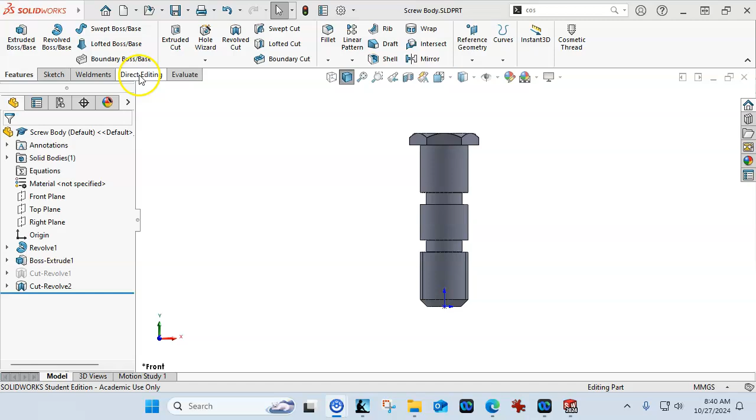Okay, so the assembly for P6-11 is not going to be real in-depth. We'll just bring up our assembly. It should jump right into the insert component. No, guess I still have that turned off. So let's go insert component.

We'll browse, I'll bring in the threaded body, and we'll just let it go that way. And then we can insert components again, bring in the screw, line those up. Oh, and my first indication, oh, it fixed both of those. So, not, I guess I just clicked the check box automatically.

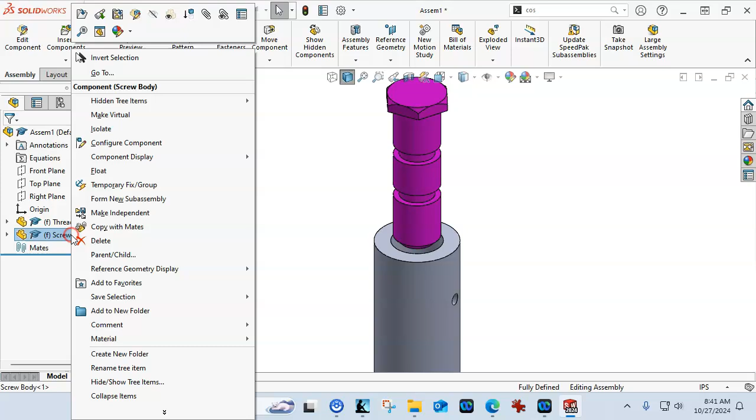But if you do get one fixed, just right click and float it. And then notice that, well, let's see what we need here. We have the 709, so we're in inches.

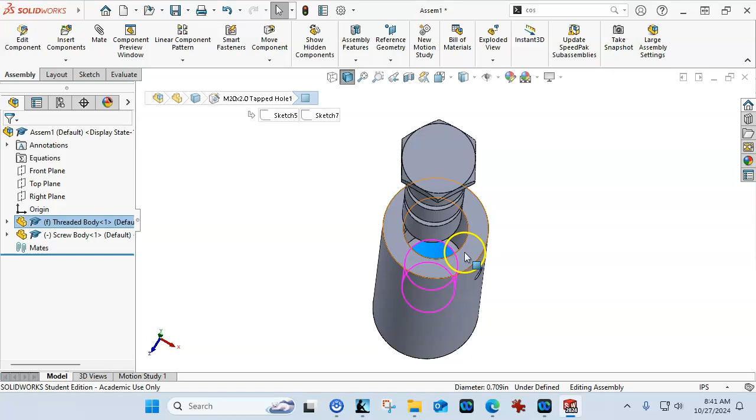Okay, that makes sense, that's the 18 millimeter. What I was going to say is I thought that the 22 millimeters, but for relief, yeah, that should be okay. All right, so we're going to make those concentric. If not, if this was the wrong size, I'd go back and check the minor diameter.

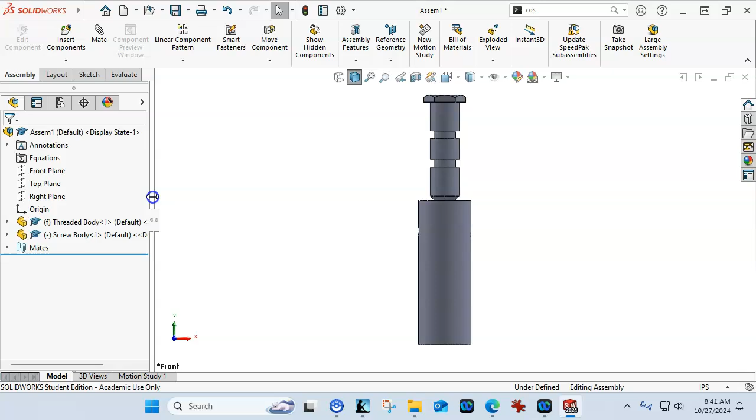All right, so let's go to looking at this with one of these guys. That was the hide, we want to go to the next one. And the body, we will put in hidden lines visible. So as that makes the intersection, we kind of see what's going on with the geometry.

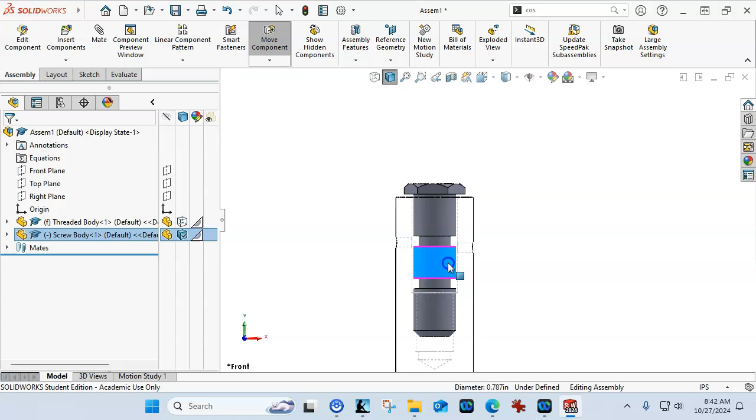So we're not going quite to the bottom, which is good because if we do tap this, and tapping is going to be sort of what material. I mean, I didn't see anything called out, but I've been doing a lot of 304 and 316 stainless lately. This is aluminum, I'm a lot less concerned about it, but...

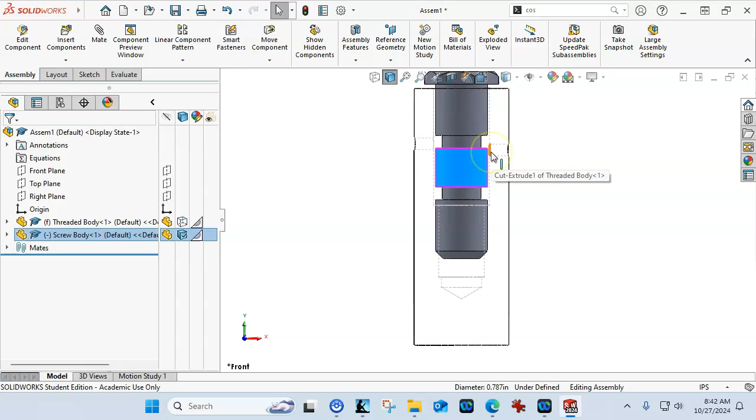...otherwise the geometry becomes a little bit of a challenge. Oh, and this one I put the same size. So we need to make an adjustment to the second.

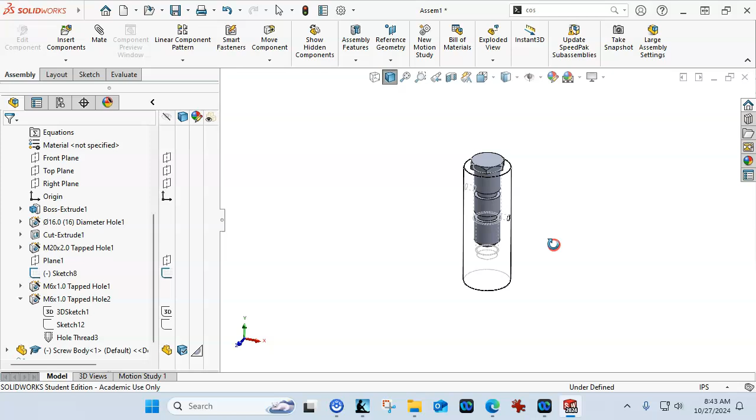So those look lined up. Again, the M6 going into a 5 millimeter thread, we're going to see some interference. So maybe we make those, they called them an M6 by 1.0. That still seems like it's going to be a little deep, but let's go into the toolbox.

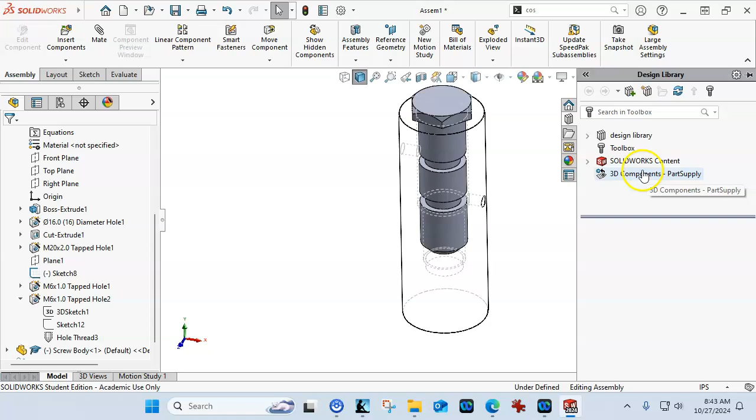So we're jumping into the library, and in the design library, we can go toolbox, tell it to add in now. We're looking for ANSI metric, bolts and screws, and we would like a hex head. Doesn't call out specifically, so probably not the heavy. We need something that will be small enough.

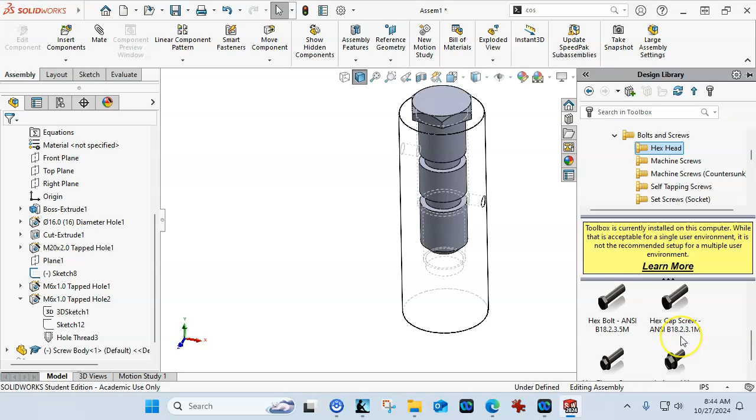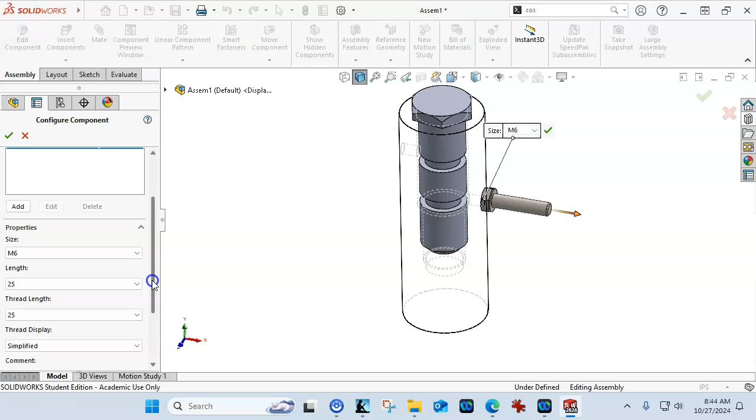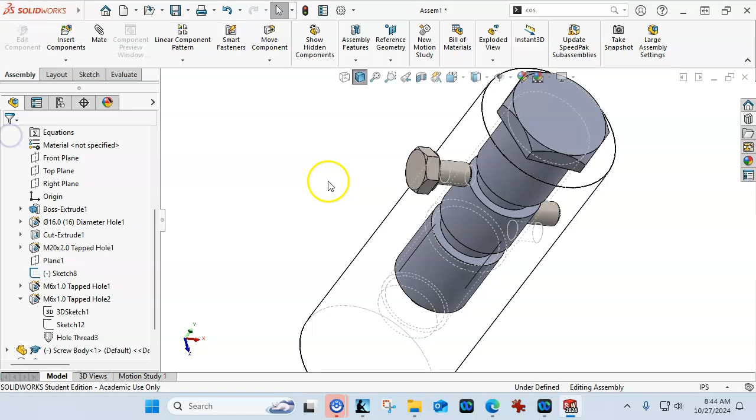All right, so this didn't jump to my geometry, like that one did, so I didn't get it lined up. But if I can, I'm going to look for the stack of marshmallows, or the concentricity, and let it do its automatic relation. All right, so that is the interface.

If we wanted that to go into the geometry, the M6 screw would be enough smaller that I wouldn't really have any issue with it going in and contacting. Maybe there's an O-ring in there, and if we were to do an O-ring and a seal, maybe that comes in and just pushes on the O-ring and provides some resistance. All right, so there's some different mechanical options there.

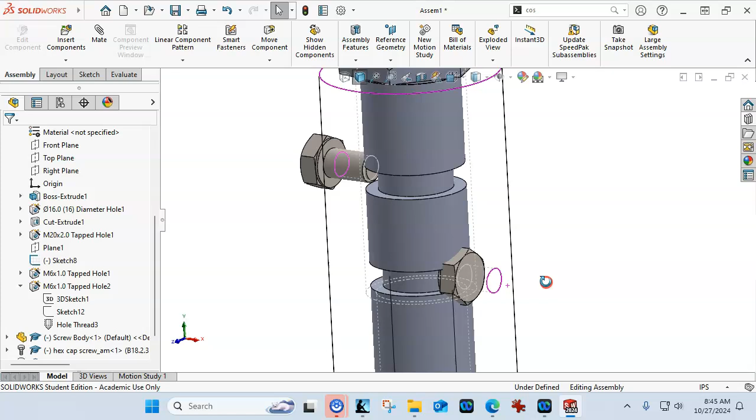Let's go ahead and select Control Select. We're going to go concentric, and I'm going to flip the mate alignment, and then we need to get that out of there. All right, and then for setting this, I could go tangent, because really that's going to be where, very closely, it's going to contact.

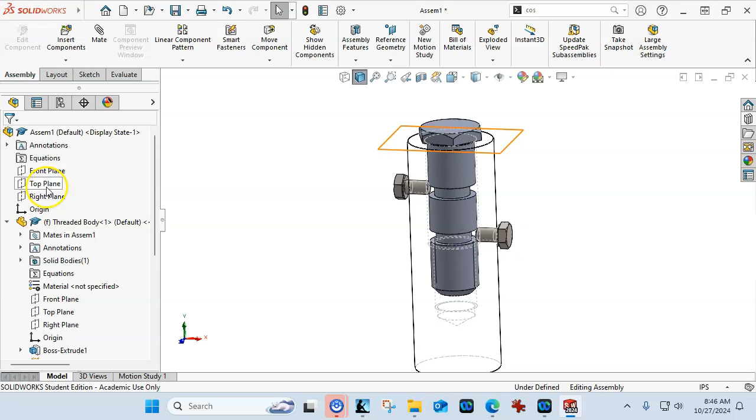So through the wireframe, I can pick those, and we go to those faces, and I can say, okay, put that at tangent. And the other option then would be, I'm pretty close there. This isn't super critical as to our geometry, so having something easy to pick.

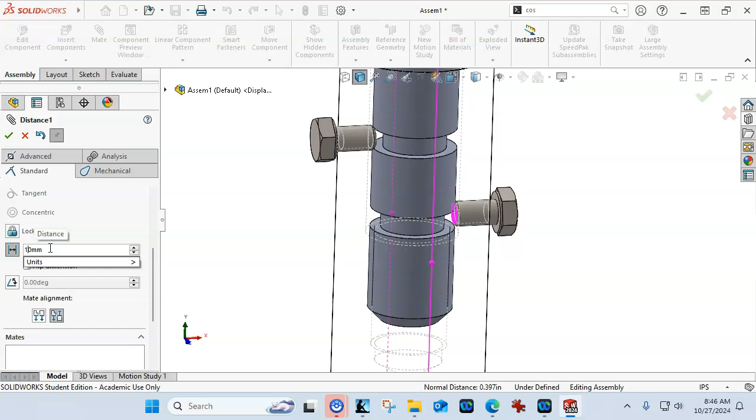But if we wanted to go with that 20 millimeter, then let's see, my mates did not show up, so we'll go distance. And we had 10 millimeters. Oh, that was 22 millimeters, so 11.

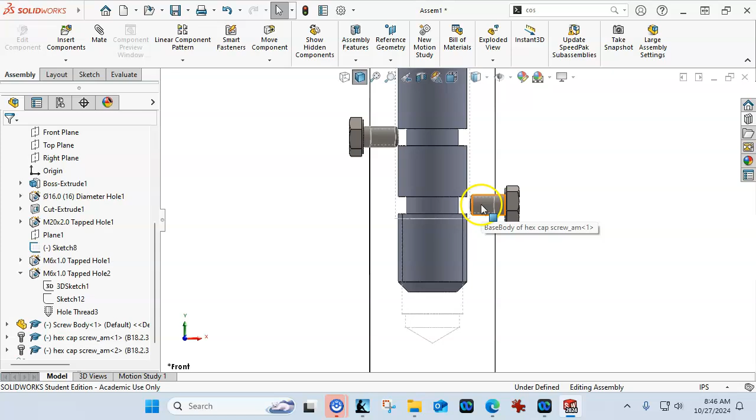Okay, so that puts us to the outside. So if we did want to control the outside, just guessing, not knowing what this really does, we're kind of stuck with maybe this is a mount, maybe this is a port. There's a couple of different ways to approach it.

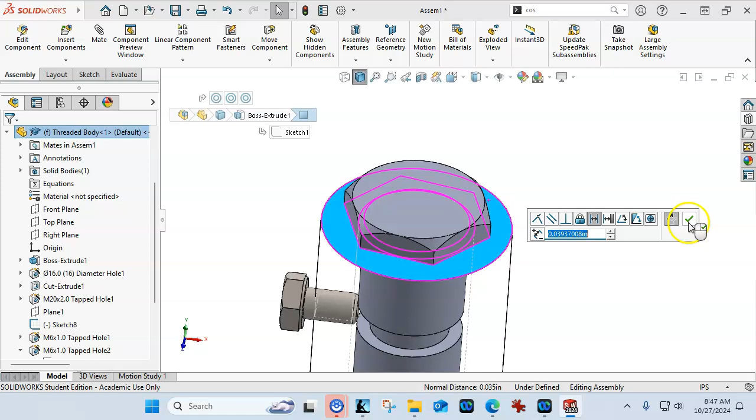All right, so looking at the face, let's move those over, and I want to go with the distance again. Let's go 1 millimeter, and we'll go ahead and accept. All right, so that puts it pretty close. Everything looks centered. It gives us our chance to make some decisions.

All right, so for the view, let's go ahead and put that one back into default. And we'll make sure to save this as the... I don't think it gave us just an exploded assembly. So I'm gonna make this into a valve of some kind.

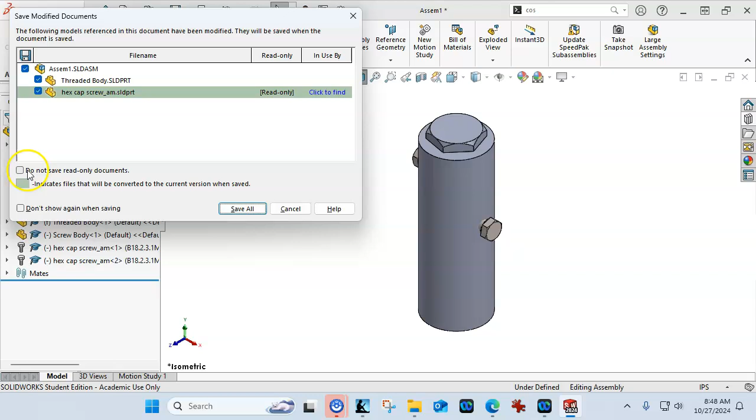So let's do this. Oh, and no, we do not need to save the hex, so we can either uncheck that or do not save, so it takes it out of the list. And whatever you want to call this, we'll name it as the valve. While we're here, we'll go straight into the exploded view.

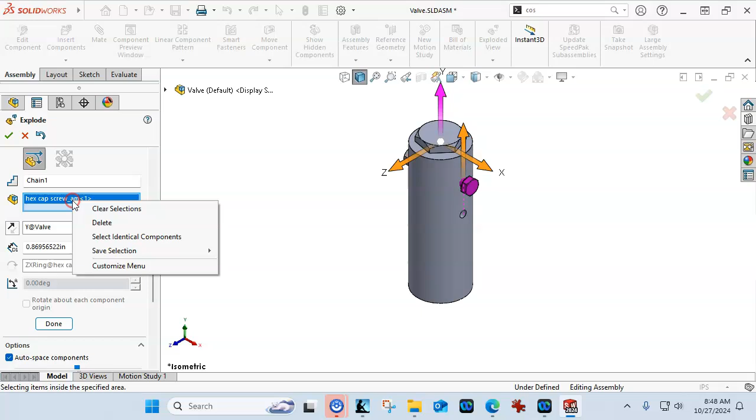We're not worried about the auto spacing because it's pretty much just going to be these items. So 3 inches should be enough, and then done. Oh, I guess I added that one to the group. No. Oh, got them both. All right, well, let's try that again.

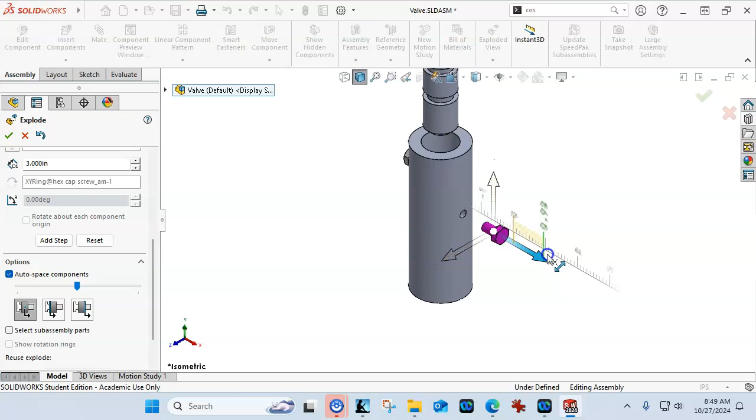All right, make sure that... all right, got to make sure in the list that I didn't already. All right, so there is only the one. And done. Then we pick the next one and we drag it out a little ways and we see what we got. 1 inch would be fine. And done.

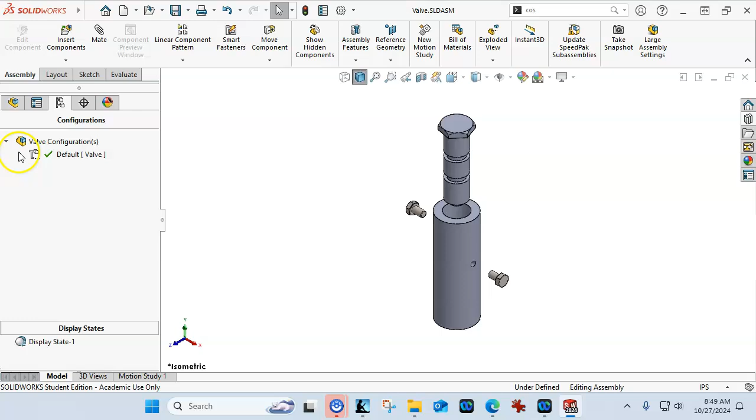And then the last one. And done. All right, so that gives us our shape. Okay, so then I'll go ahead and illustrate the assembly cut, and I'm going to use this in the drawing as a cutaway view of the face, of the intersection. So if I go back to the exploded view, collapse it, and then let's go back to the design tree, and I'll just open up a sketch on the bottom.

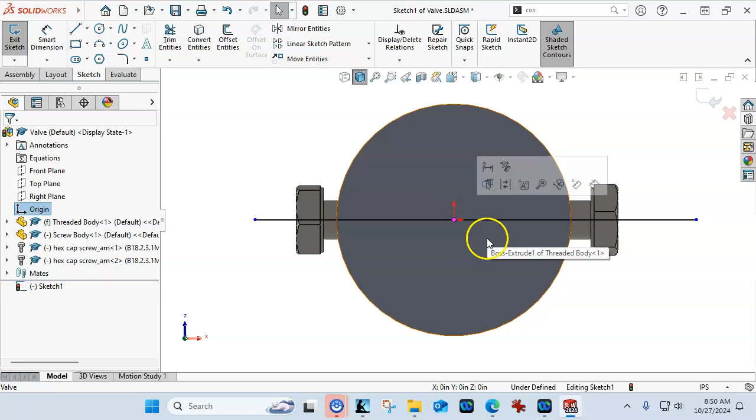And we're going to draw—I don't know if it needs to be infinite length, but we'll make it long enough that if we needed it to cut through everything, it would. And we'll set that as the midpoint. And our length, we can go like 3 inches. It's not that it matters.

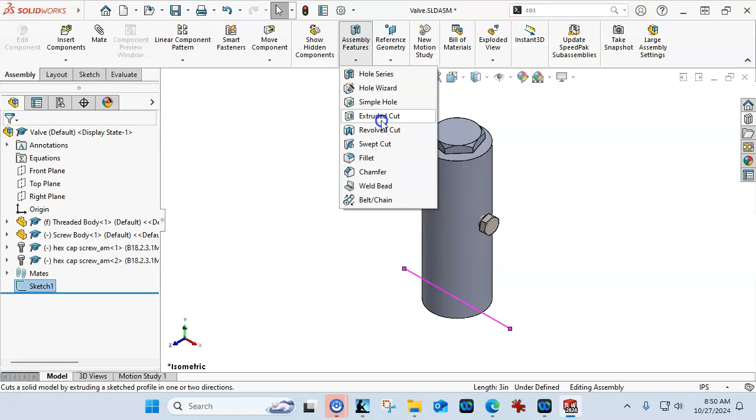All right, so back into the isometric, selecting that sketch, we have assembly features, and I want to do an extruded cut, but I only want to cut the threaded body. So selected components, and we're going to turn off the auto select so that it gives us the geometry that we want, and then we're going to go through all. So the first arrow goes this way, and the arrow that does the flip side to cut does that one.

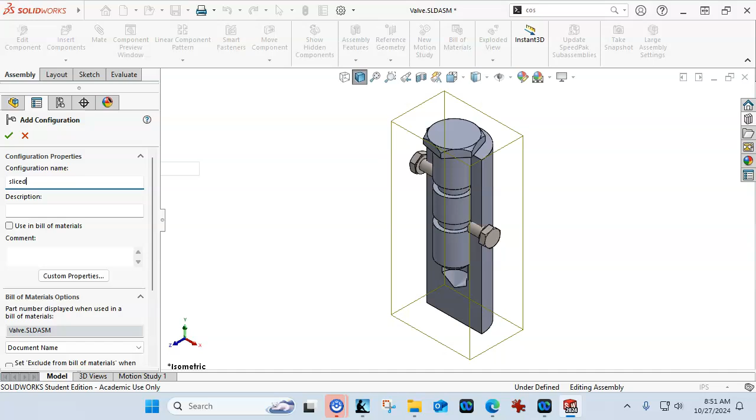All right, so having done that, I did not set this up for a configuration, so the best way to manage this is to add a configuration, and the configuration name is—we'll just call it sliced. And what I want to do is, we're double checking, we're in the default, we need to suppress. So depends on which way you want to work with that, but that gets us the geometry.

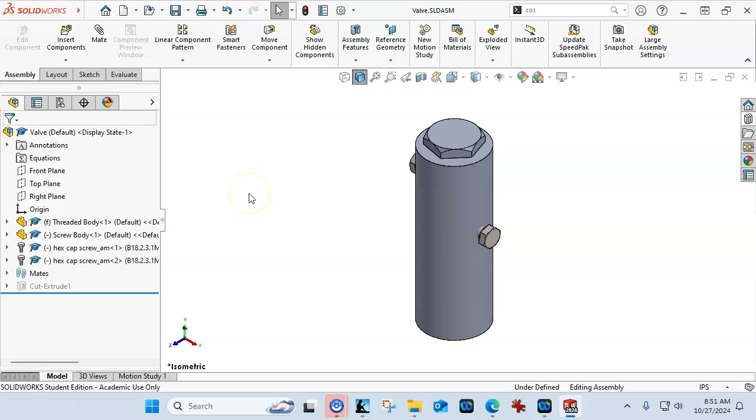Is that necessary? No, but it does show some of the other geometry. So the other thing I could have done is if I wanted a quarter section, I could have just brought the lines in at a 90-degree and it would just remove partial, but splitting it, slicing it in half is not too big of a deal.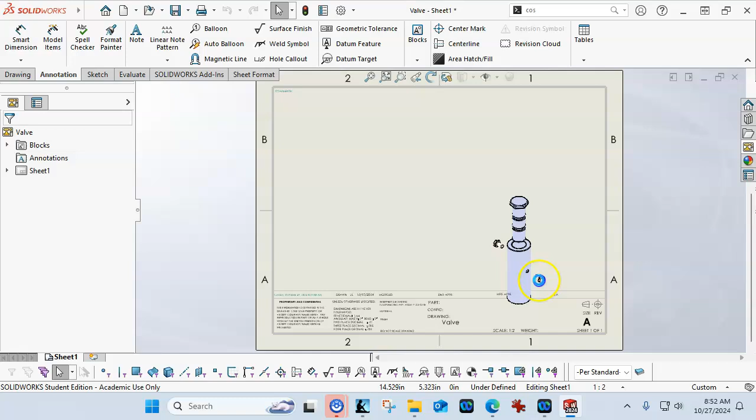All right, so if you've made your own template, then I would recommend that you use it. And if not, then the A landscape's going to be fine. And we'll go to our view palette, grab the valve, and I would like the isometric exploded first so that I can go right into the tables, go to the bill of materials, and if I have a favorite—no, it jumped out. I need to put mine that I created a while back in there.

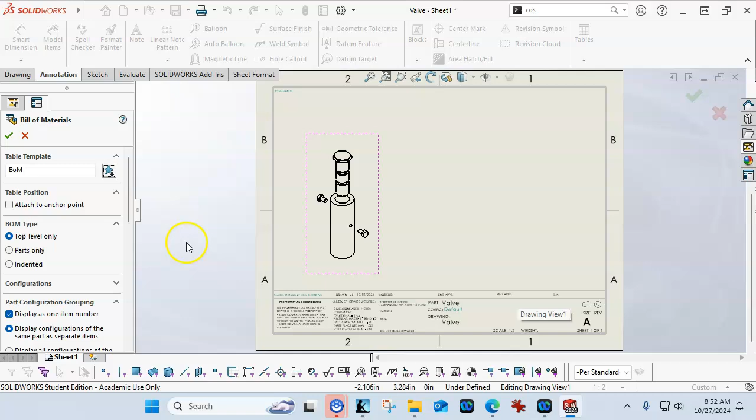So there is the bill of materials SLDBOM, and we want to add that table. So I haven't put any part numbers in. Do we have any part numbers? Apparently we do not have part numbers, so you can make up whatever part numbers you would like.

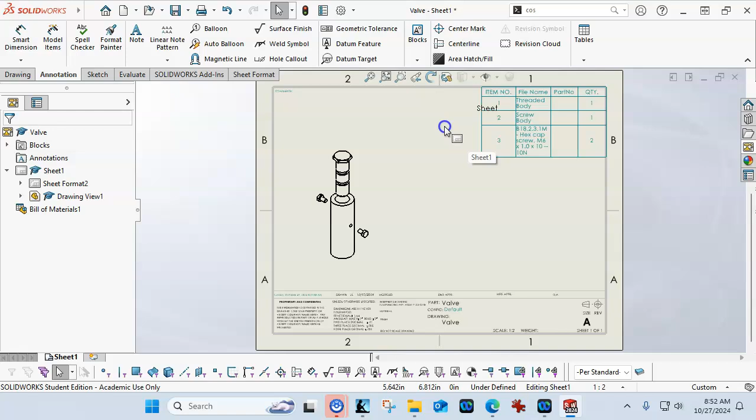So let's drag these out a little bit. Probably should zoom up just a bit. All right, so that one should be okay. And when we're reading the toolbox...

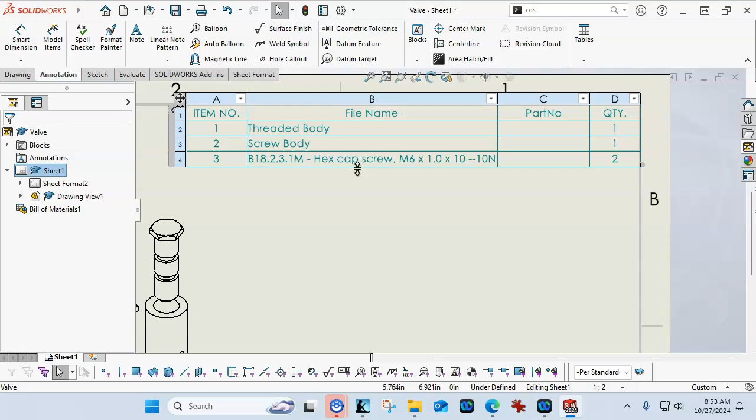Geometry: hex cap screw. If it was a socket head cap screw, we would see the SHCS. If it was a flat head, we would see FH. If it was button head, we would see BH. Okay, so we have all of those as parts of our deciphering what's going on with these screw geometries. Next thing is the auto balloon, and we'll line those up, see how it looks to the left.

And it's not too bad, but we might as well see if we can bring that one back. Let's see if it'll let me have the grip, and we'll drag back to that point. If it goes to the question mark, it's just telling me I missed, so try again.

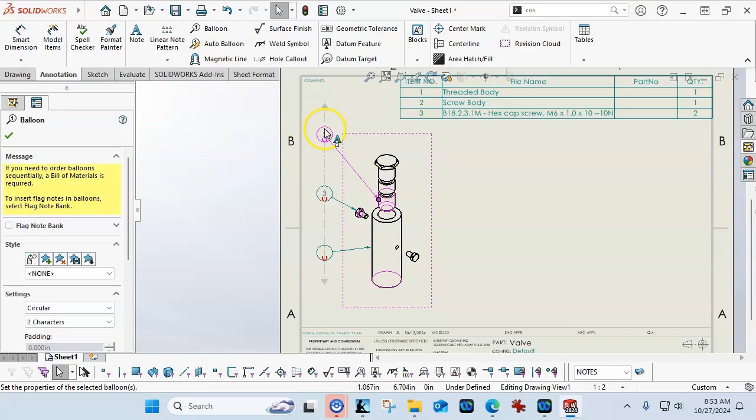We can bring those a little bit closer. You can also drag the magnetic line to control the spacing.

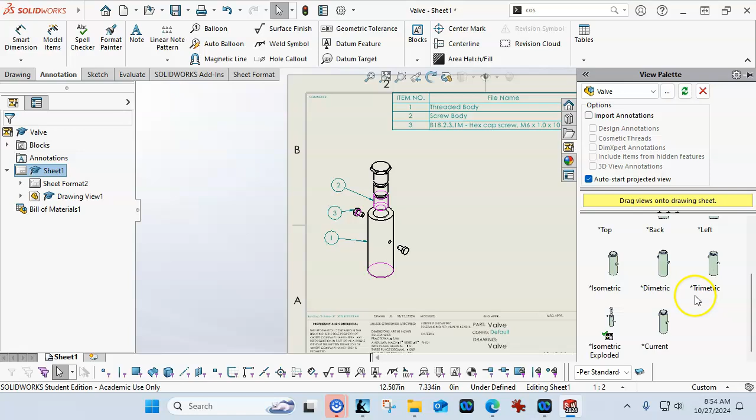Let's go back into our view palette. We'll bring in the standard isometric, and this is where I would want to pick my configuration as the sliced. Now we can see a little bit on the internal size-wise. That was 1/2, let's switch it over to a custom, and we'll go 1:1.

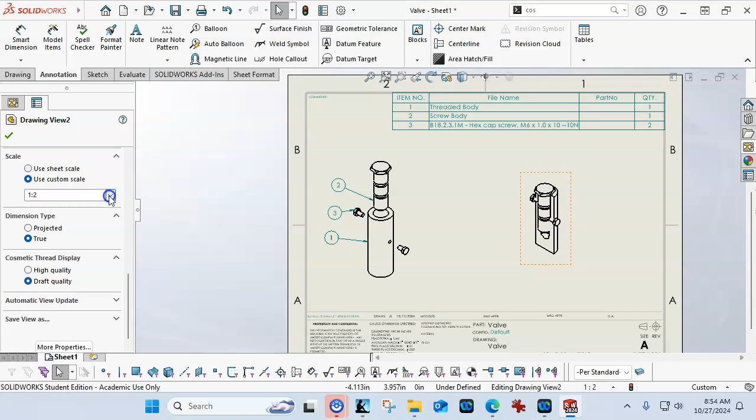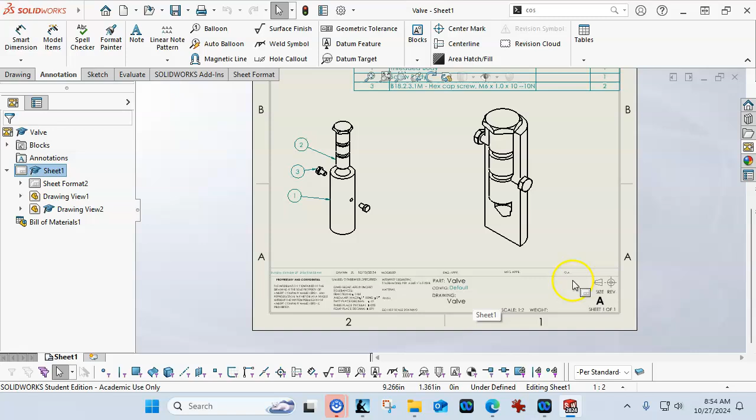All right, so not too crazy. Let's go ahead and save this as the valve. I'm not going to worry about the properties on this one, or as much about the properties. The valve default, those items have made it in there.

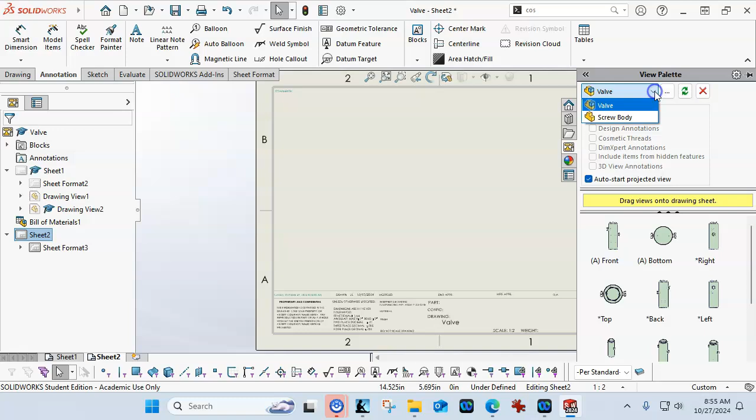Insert from the view palette. We'll go pick whatever other one is open. We'll just bring in the front plane. I don't like the orientation, so if I drop that one and that one, then we can accept it. But I really want to turn this 90 degrees, so let's go 90, see what we get, apply it.

And yes, what it's warning is that you may lose dimensions. Last time I tried it, it didn't dump everything, but it's always a concern. If you know you need to rotate, do it sooner rather than later, because once the dimensions are in, it's kind of hit and miss as to if it will dump all of the dimensions on you.

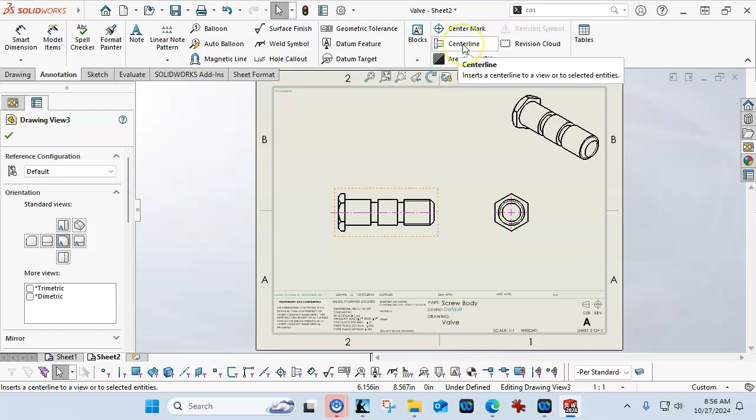All right, so I wanted a center line. Pick the view, go into the center line. If the view's not selected, you'll have to pick it again. That looks okay, so let's go stretch that out just a little bit. Yeah, it looks all right.

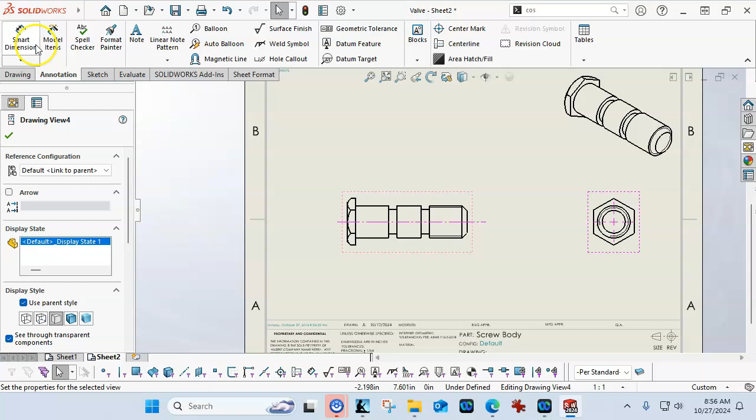All right, so for our geometries then, we want - and we're looking at the end here, so it's not as clear what's going on - but let's go with, and since we're in inches, we're going to see that size. Would like a chamfer dimension.

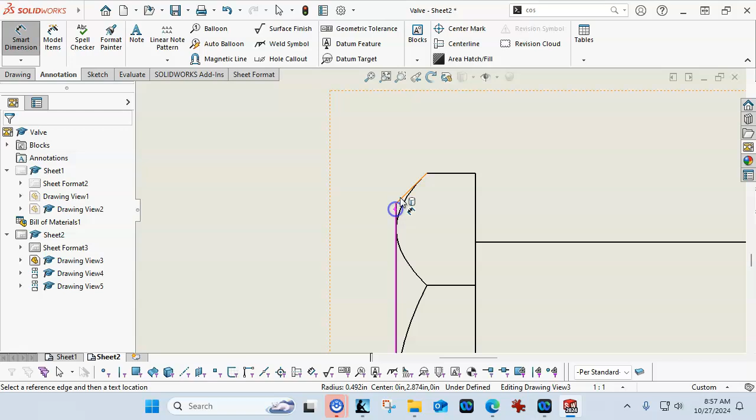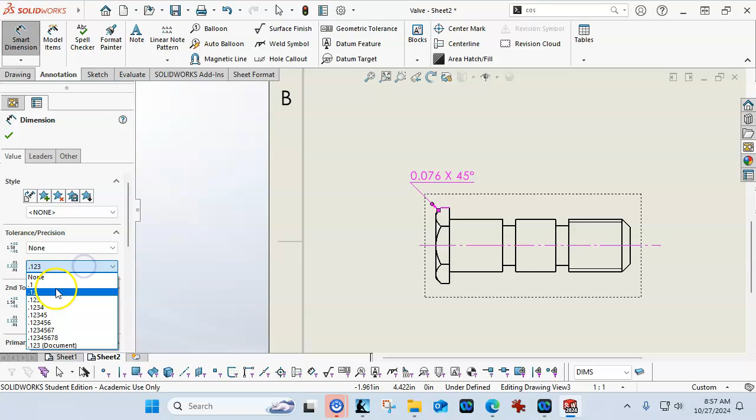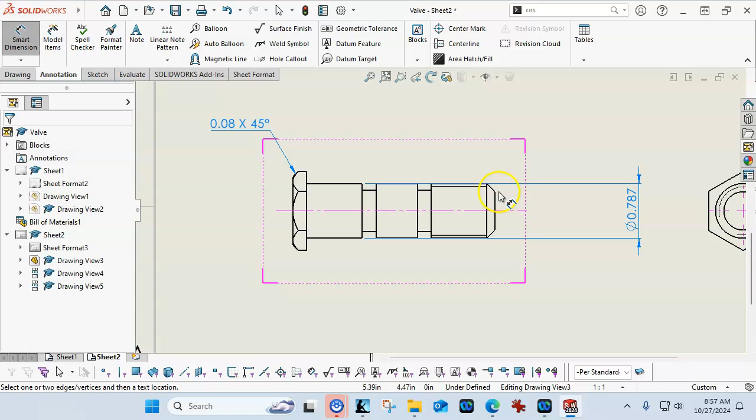And I think it makes a little more sense, although it's not as clear. It's always a concern, even though showing that as 3 times, yeah, it's always a challenge because even the M20 is going to be a little bit under that after we get through cutting the threads.

So let's see what it looks like. We can always change it later. The diameter, 0.591 for 15 millimeter. That looks a little bit crowded.

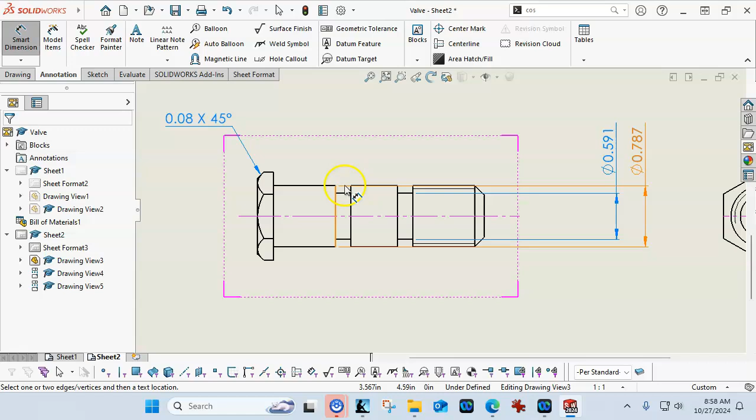So I usually would go baseline from the tip. So let's go 2 times. And realistically, let's go to a - oh, that was an inspection. I really wanted the reference. Okay, so giving this, maybe not both.

All right, it did not toggle that one out for me. So the way I would look at this on the lathe is I'm going to touch off on that face and start doing my geometry to preferably the back sides. Now, if I left it at the 197, that this is not a critical groove,

then going to these geometries, when I set up the grooving tool, I'm touching off here and I'm going to see that face and that width come over, and using a 5 millimeter grooving tool, I'm just going to peck it into it until it gets to that geometry. So if I'm not going to baseline all of those, then I really didn't need the reference.

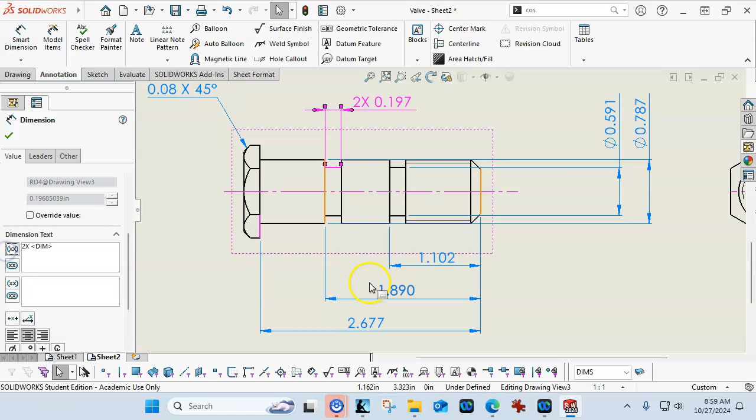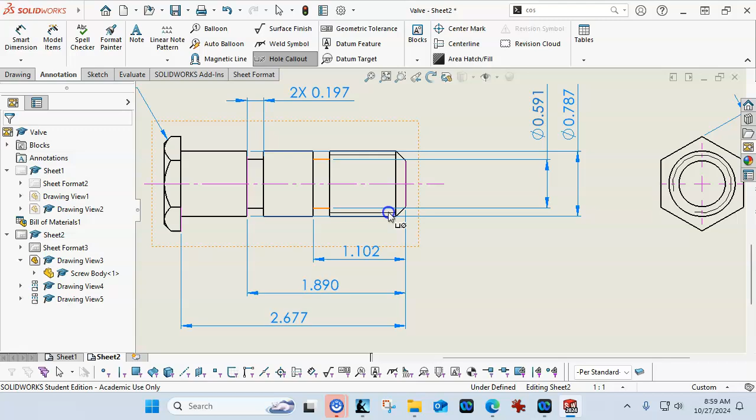All right, so we need to see on our - let's see if the smart dimension will do it. I go to the cosmetic thread. No, it's still doing that one, so let's go to the hole callout. There we go.

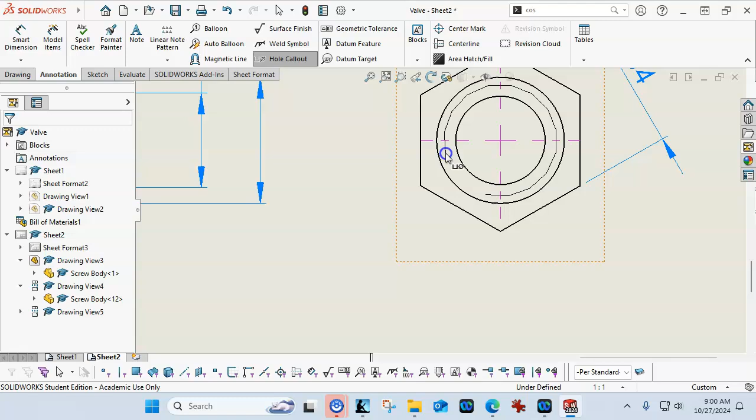We'll try the hole callout anyway. 0.787, no. And I did not tell it to show that on the cosmetic thread, so it's not picking that up. So if that's the case, we could either override the dimension.

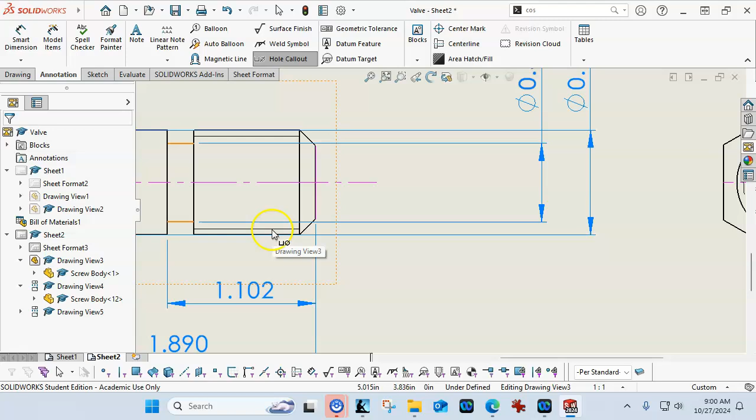I know I've gotten it to do that before, but it is - I went back to the 197. We'll try one more time. No, hole callout's not finding it. All right, so if that's the case, let's go with the smart dimension. There it is. I don't know why it wasn't highlighting, but it's always a little annoying when it does that.

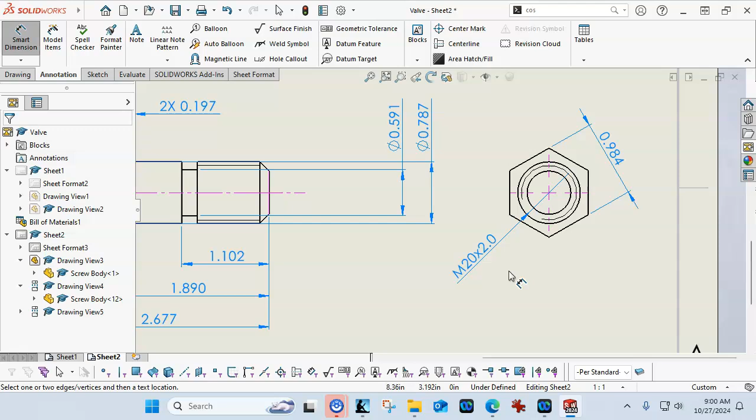So the M20 by 2 thread gets called out. It should be apparent, but for thread depth, then we may want to just measure for that geometry as a reference, 906.

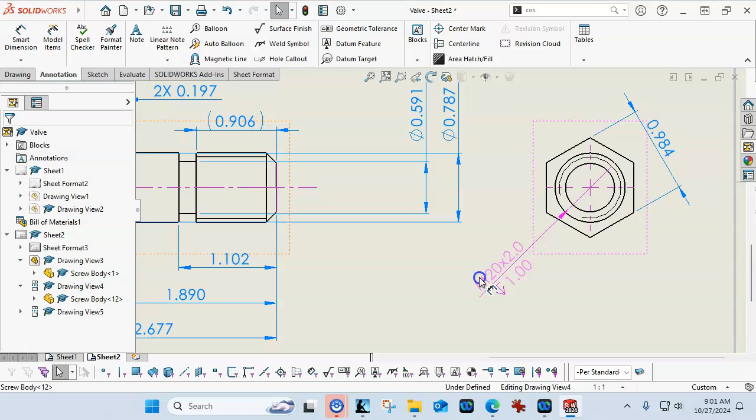And then we can go in and add that as our geometry. So depth. And let's see, that was 197, so the thread depth on a 2 millimeter. Again, that's more for reference, but it says to overrun it into the geometry or up to next. All right, so it's just some choices that we have to make.

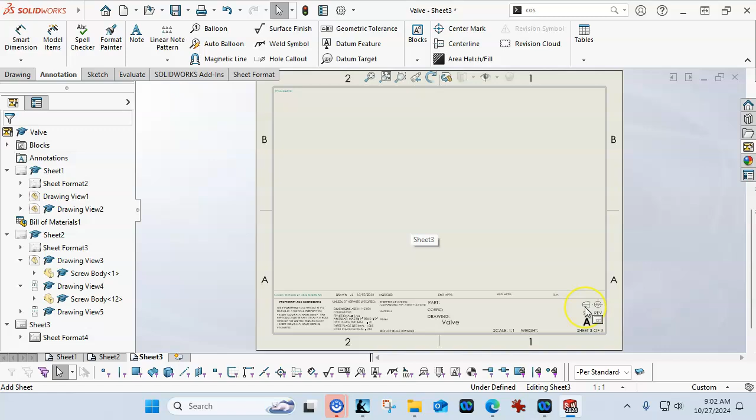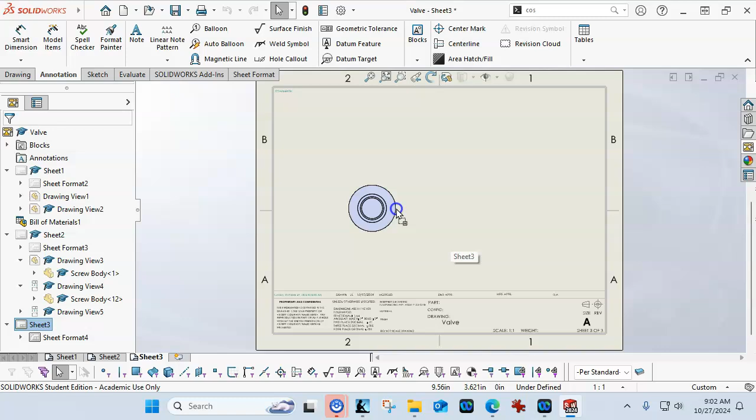Let's go into the next. So when I made the template video and named that as a block, that was one I was looking for as the issue. So we'll get that turned off. All right, so the threaded. Let's go with the threaded. We'll look at it from the top. Drag that in. We'll go to the isometric and accept.

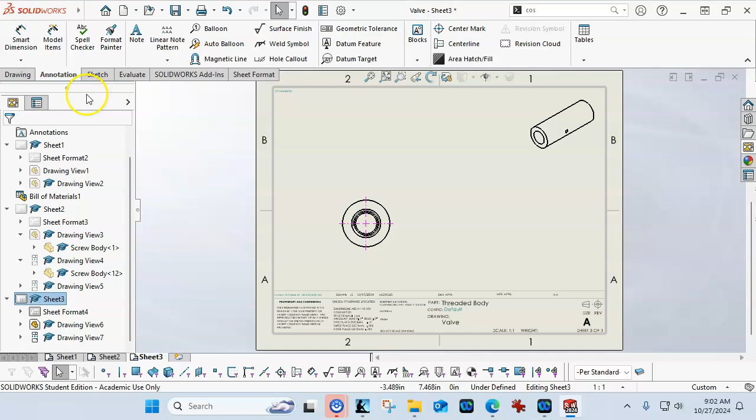So this is 1:1. It's not going to be too bad. We'll go to a custom scale and shrink that down a little bit. Ideally, we would say isometric, half scale, something along those lines. But most of the time, it's apparent what's going on there. So go into the drawing, and I'm looking for a section view, and we'll place that on the origin and drag it out. So what this isn't going to do is show me the other lines.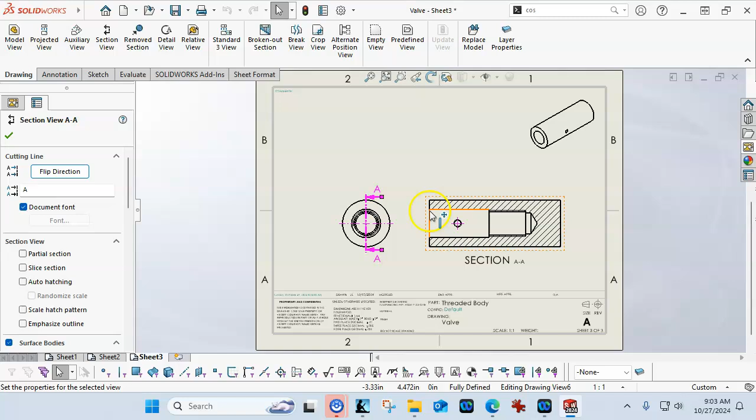So we would lose. Let's see if we reverse that. If I flip the direction, do I get both of them? No, I'm going to lose one or the other of doing that. So we would need to decide: do I want the other view, and carry that through. So as our 3-view drawing goes, that makes more sense, but I think we're going to have to use a smaller or user-defined, and we'll let it go 3/4. And then let's bring out one more projected view. All right, so that does help us a little bit.

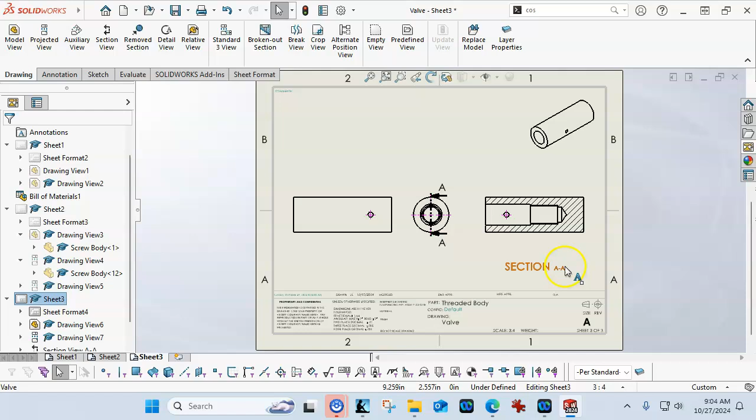One of the things I've often changed is the font for the sections. This always seems a little weird to me, how big that is and then how small that is. So I usually just make the section the same size as the label. All right, so back into our smart dimension. We'll pick the first hole location. We need the hole callout. And we'll just go ahead and duplicate the hole callout rather than trying to set it twice. Oh, I picked that one up again.

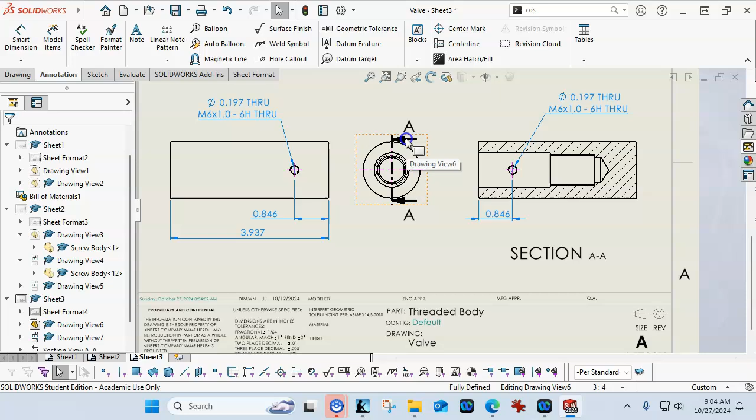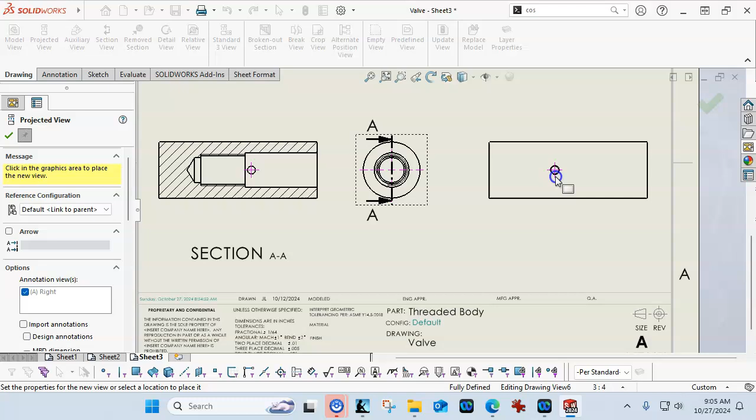So let's flip the direction, even though I don't like the way that is going. Interesting. So let's make some adjustments. We'll go ahead and go that way. Probably easier just to bring in the next projected view. So one on that side, one on that side. And no, it did it to me again. It put that one over there. Well, I've done this before. Now let's just undo a couple of those.

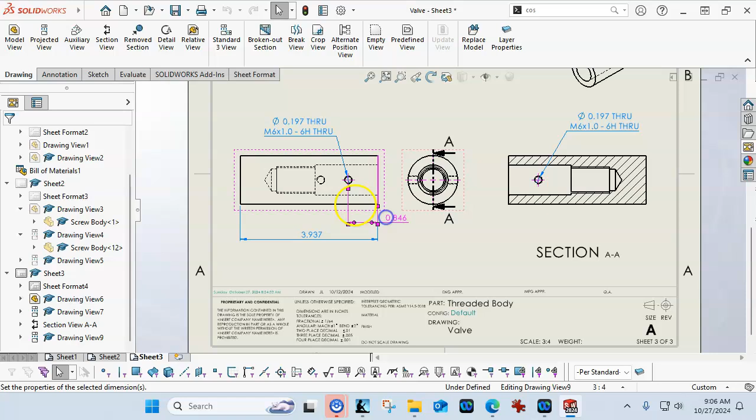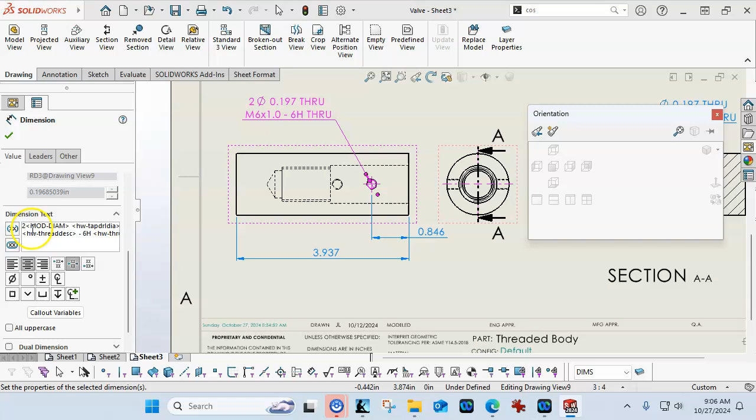So even though I'm not a fan of the dimensioning in view, I do remember running into this before though. So let's go back to the parent view and we're going to make all of these through. Now if we tried to make that a broken out section, that would probably work. But it is strange that it's not giving me that geometry the way that I want it.

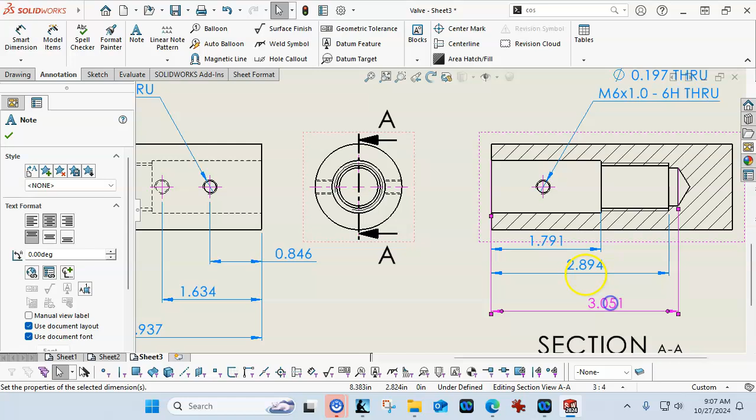All right, so for now, I'm not fond of this as a solution because dimensioning to hidden objects is not a good plan, but it does get my geometry in place. All right, let's keep going though. So from the face, and then we'll go to the depth. All right, so baseline dimensioning, when I go to inspect this, these are all direct measurements rather than having to do math or stack up, so this is going to be preferable.

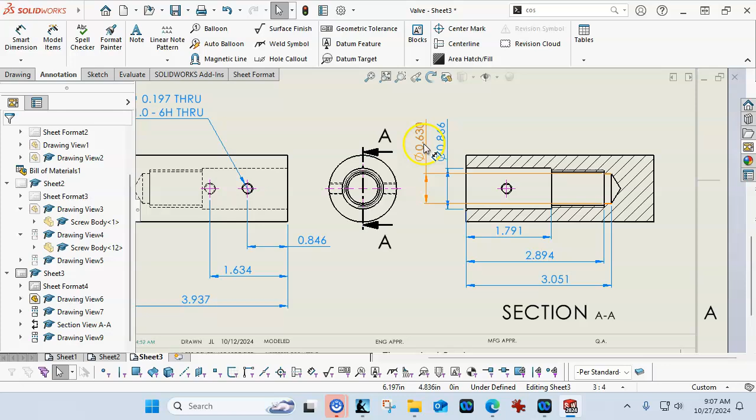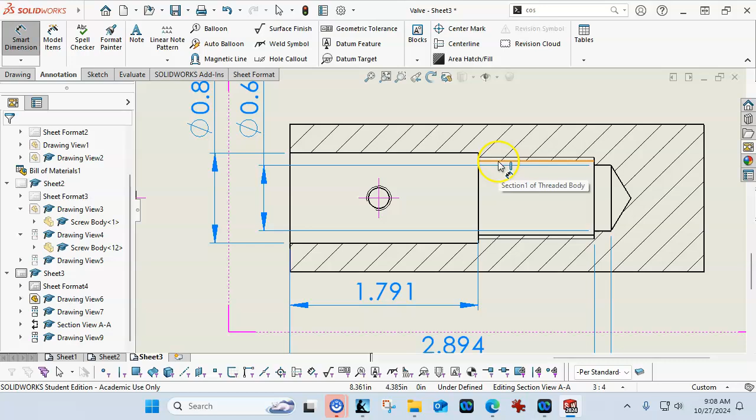I did the 2 times on that one, so we should be able to go that way. And the only difference is if I did the hole callout bit. A lot of times when that geometry is so close, it's hard to tell which one it's going to. So maybe that will help with the geometry. So let's see, is it getting? It did find the hole callout on that one. So the 709. And the 1.102 is from the face.

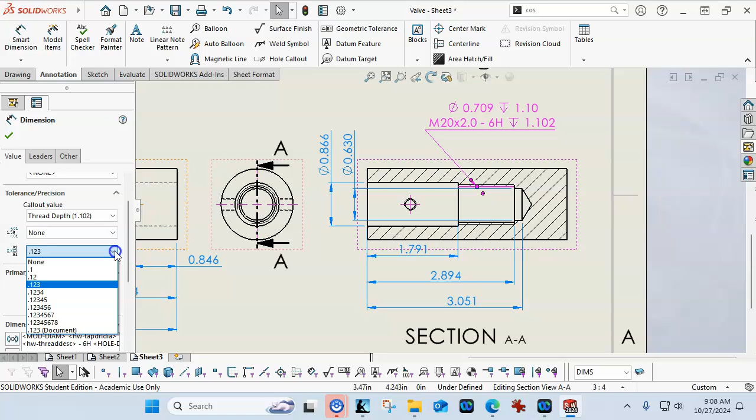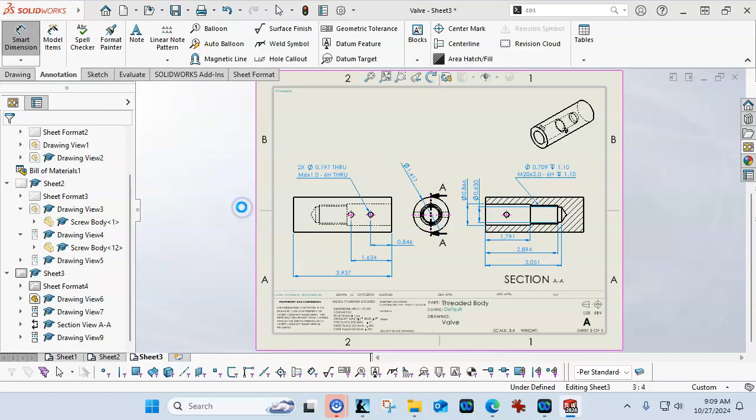So if we go into our geometry settings, then I can find those 2 numbers and just set those to 2 decimal places. All right, so again, this one's a little strange. I have to come up with a better way to do that, but that gets us started. So we have that geometry, we have our drawing, and we go ahead and save it, and that'll be good for now.